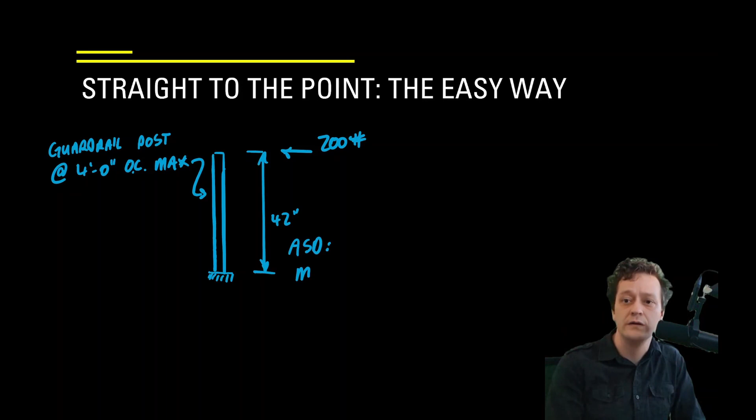So we're going to get straight to the point today with the easy way. The easy way is you make sure that each of your guardrails is at most 4 foot on center, and when doing your analysis, you apply the 200-pound point load at the top of that guardrail. The guardrail is 42 inches tall per code, though obviously it can be a little taller. That ends up giving you the moment at the base of the guardrail post of 8.4 kip-inches for allowable strength design and 13.4 kip-inches at LRFD.

The difference there, of course, being the live load factor of 1.6. This presentation focuses on the moment that occurs at the bottom of the guardrail post, because that ends up being the most important of important things.

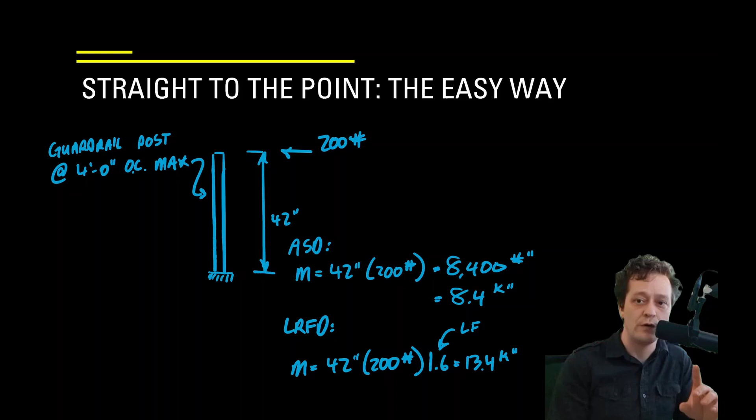You also need to check the guardrail post for the same load. The top rail needs to be able to resist these loads. The handrails need to be able to resist these loads. The brackets that connect the handrails to the guardrail post also need to be able to resist these loads. But this presentation is going to focus on that moment at the bottom of the guardrail post, because that's where I see the most problems usually show up.

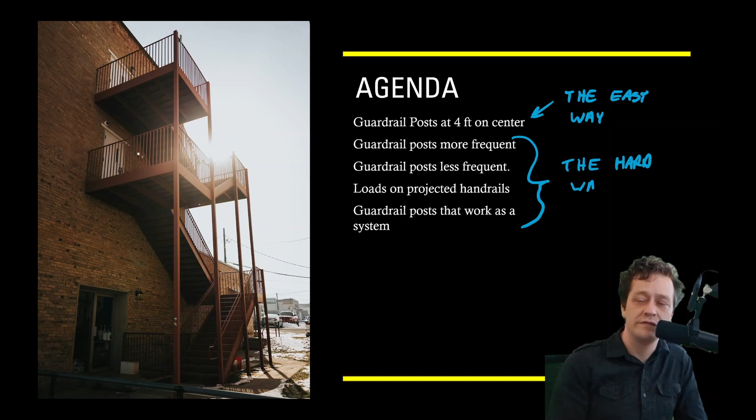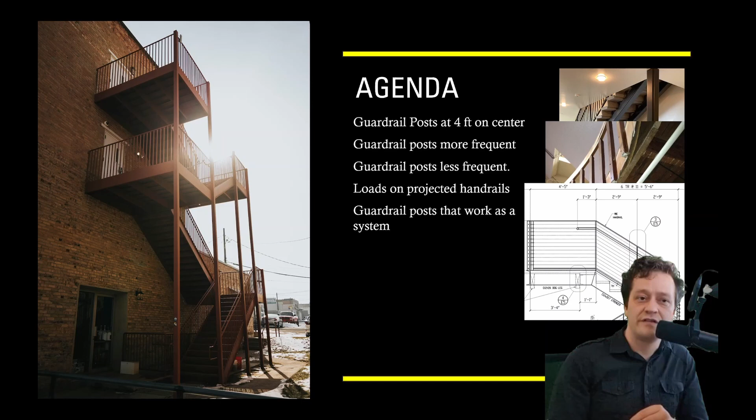So that was the easy way. But of course, as with all things, there are hard ways. We are going to look at a series of different situations in this presentation. The first of those situations is going to be the easy way, because that's how I like to go. The second situation is different - these guardrail posts we're assuming are 1 foot on center. This third example is going to look at the case where the guardrail posts are longer, the spaces are larger.

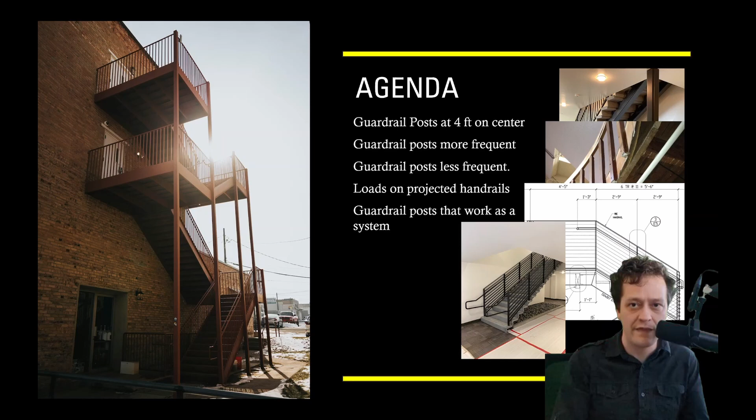One thing I need to address quickly, because there's no slide about it, is the load on the infill rails. That ends up being a 50-pound load applied over 1 square foot. So I usually will figure out how many infill elements are going to receive that load. If it was 8 of them - I don't do math in public - 50 pounds divided by 8, then each element would receive a 6.25 pound load. Technically, that 6.25 pounds is spread over a foot, but if you apply that load as a point load to the infill, you're going to get a conservative result for the strength of that infill.

The final thing we're going to look at in this presentation - I'm not going to do too much analysis on this one - is just the idea that these guardrails are a system. So when you end up with point loads and indeed line loads, depending on your assumptions, those systems are going to have different results.

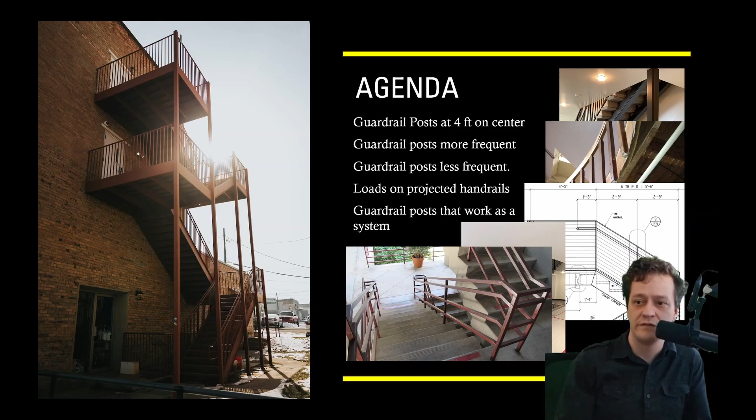That's the one at the end where I blather a bit. I'm not saying I won't blather other times. I'm going to blather other times, trust me.

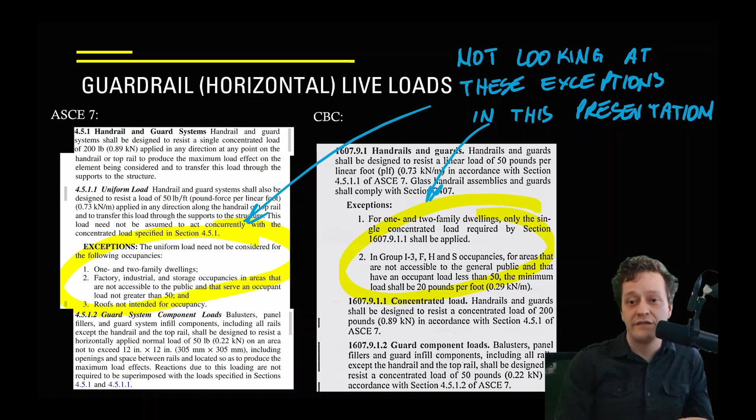So in this presentation, we're not going to look at the exceptions. The exceptions are 1 and 2 family dwellings and other fringe cases - roofs, factories, industrial settings. If you design your guardrails and handrails for the loads we discussed today and then use them on a roof or in a factory, your design is going to be a little conservative, but nobody got sued because they were a little conservative.

Keep in mind there's one thing I quibble a bit with. This is the code, so always definitely do what the code says. I don't think I would have necessarily written it this way, but in the California Building Code, on the right-hand side, it says to use the 50-pound per linear foot in accordance with section 4.5.1.1 in ASCE. So if you go to ASCE section 4.5.1.1, it instructs you to apply that load in any direction along the handrail or top rail.

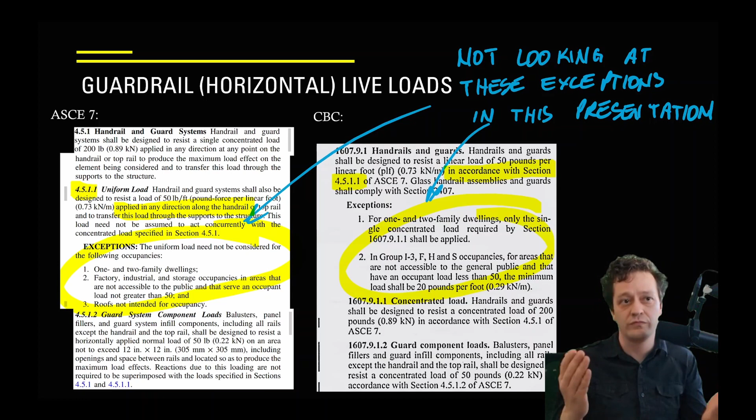So that means that not only do the 200 pounds and 50 pounds per linear foot get pushed out to save you from toppling over the edge, but also code requires that those loads occur inward as well. That's the way it was written.

So now we look at the easy case where these guardrail posts are put at 4 foot on center. Your 50 pound per linear foot or 200 pounds, non-concurrent, give you the same net result at the top of every guardrail post.

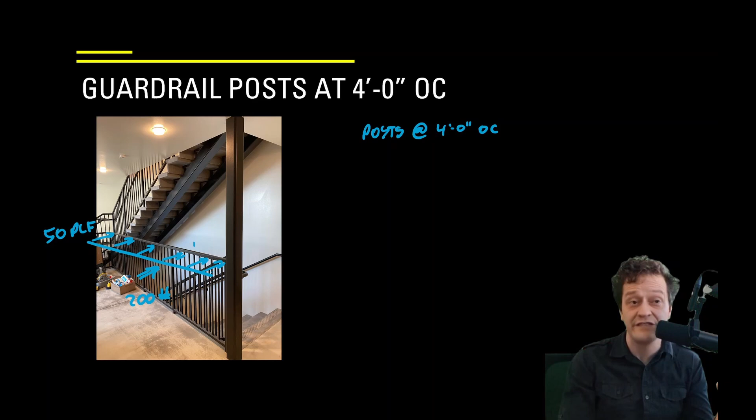You do need to verify that the top rails and infill also meet code strength requirements. There are, maybe somewhat surprisingly, no deflection requirements in the code for handrails. I've seen some weird design examples where I calculated that handrails would get like 6 inches of deflection.

As a reasonable designer, you might want to stiffen up that system, but there's no code requirement for that. This picture is a good place to get started on the idea of tributary length, because there are 4 feet of top rail tributary to the guardrail post, and at 50 pounds per linear foot, that 4 feet ends up with 200 pounds.

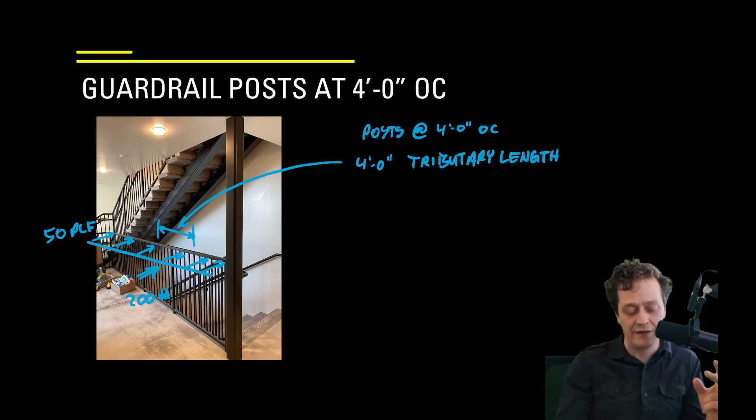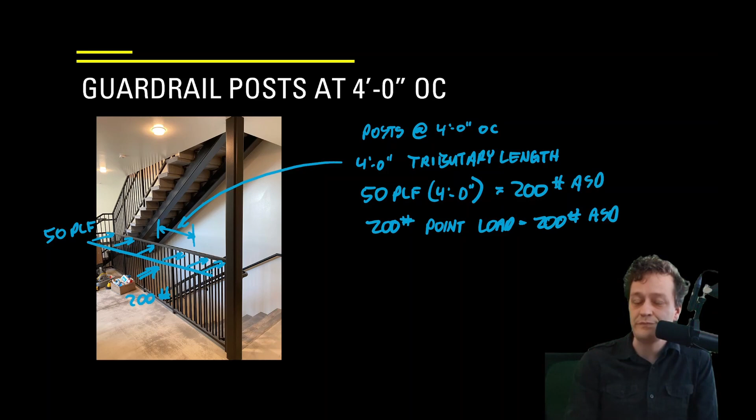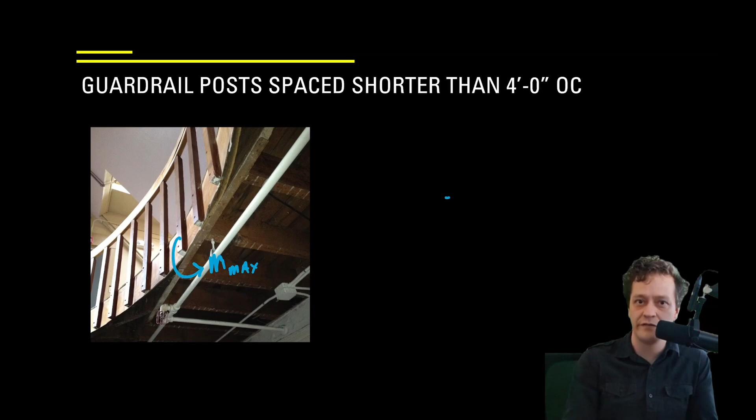If it doesn't make sense, just put your posts at 4 foot on center maximum and you'll never have a problem. These loads are in allowable strength design, which is going to be for the rest of this presentation. If you're doing anchorage analysis with Hilti anchors or some such, you'll definitely have to use LRFD, but I'll often use allowable stress design because it's easier.

If all of that is Greek to you, I will eventually make a video about the differences between ASD and LRFD, but I haven't done that yet, so you'll just have to wait. Or go to YouTube and type in ASD versus LRFD, and I'm sure other people have addressed it adequately.

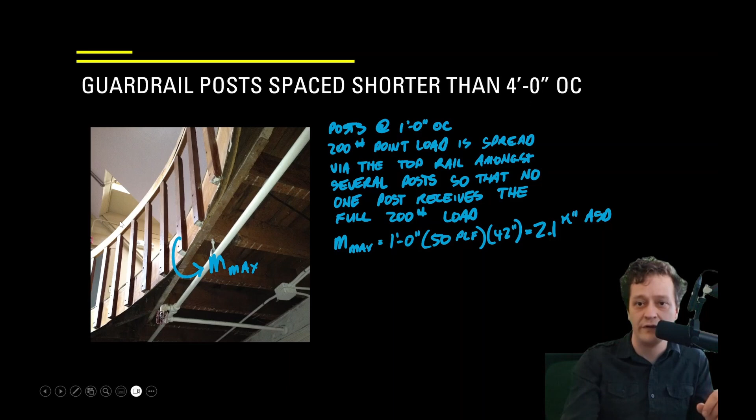This is the example where we have posts at 1 foot on center, and we know there's this top rail here. If you receive a 200-pound point load anywhere along that top rail, it's going to spread that load to many adjacent posts.

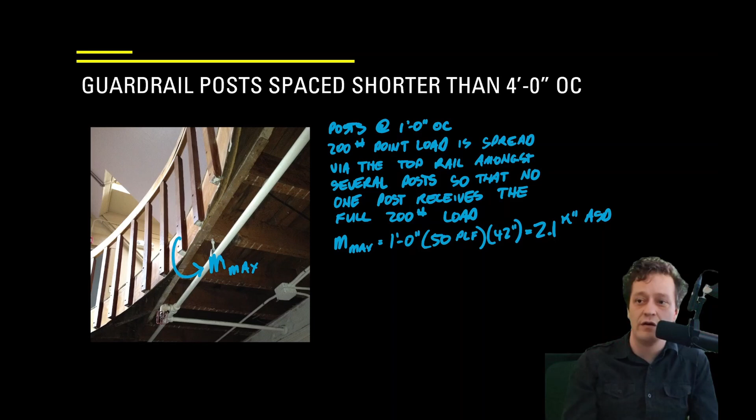So the moment at the bottom of these posts is actually governed by the 50 pound per linear foot. If you have 1 foot on center for these posts, you're only assuming a 50 pound point load at the top of each post. And so your allowable strength design moment is 2.1 kip-inches.

That's not my project right there. I don't know if those little anchors, they look kind of small.

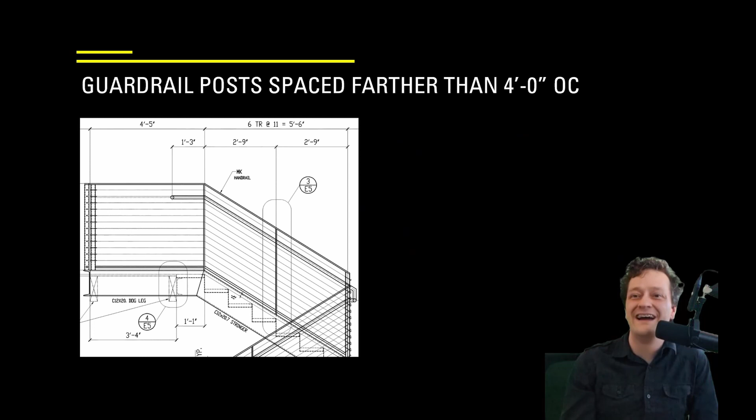This is the example where we assume the guardrail posts are spaced farther than 4 foot on center. You can see on the left-hand side, they went 4 foot 5 inches. On the right-hand side, they actually went 2 foot 9 inches.

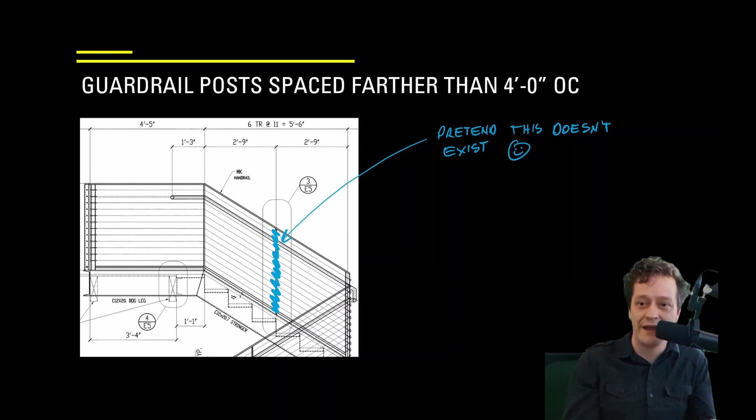If you add up half of the tributary length on the left and half of the tributary length on the right, it ends up being less than 4 feet, so they did it the easy way here. But we are going to pretend that this middle one doesn't exist for this example.

Our tributary length of that top rail producing the maximum moment at the bottom of that post is almost 5 foot. And so the maximum moment is 10.4 kip-inches.

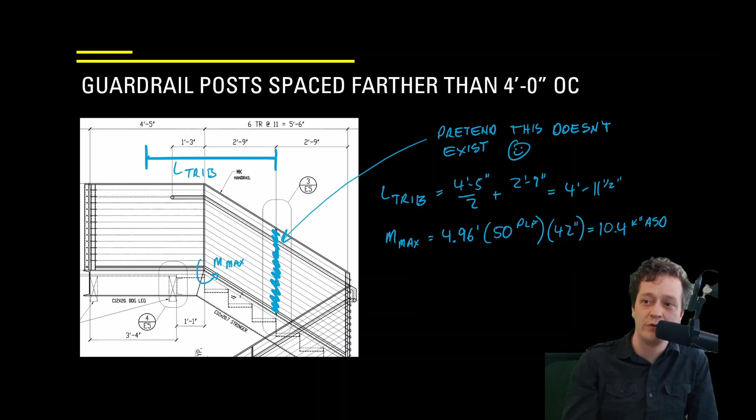So this is projected handrails. That 200-pound point load or 50 pounds per linear foot obviously applies in any direction along these handrails.

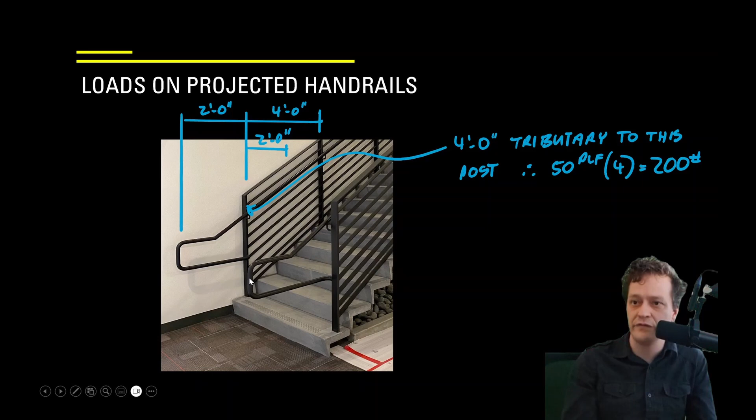If we wanted to look at this anchor at the bottom of this last post, this is another project that I didn't actually do, so this is not to scale. This thing looks to me like more than 2 feet, but if we assumed it was 2 feet and you had 2 foot on the right-hand side, you'd still have the 4 foot of tributary length for that guardrail post, and nothing really changes too much.

Which you shouldn't do because you're not being paid to do that. But if you did do it, it would almost certainly work.

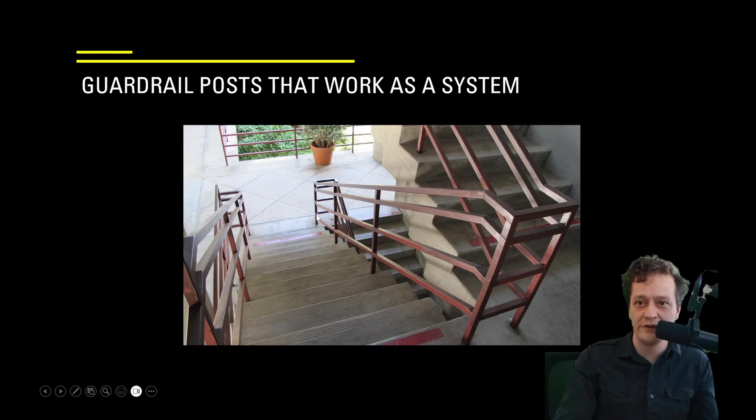At the end of the day, your best bet is to go with the easy way. Put each post maximum 4 foot on center, and when you're doing analysis, apply a 200-pound point load at the top, and you'll always turn out okay.